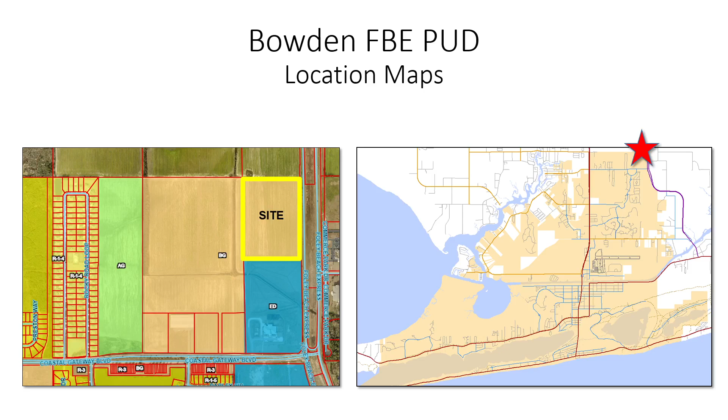These are some maps that illustrate the location. The map on the right shows the entire city limits, with the red star indicating the northeastern portion of our community where the site is located. The image on the left is a zoning map. Immediately to the north are the city of Foley city limits, and immediately to the south that ED zoning is the Auburn vet facility. Much of this area is zoned general business and is largely undeveloped other than a mini storage facility on Coastal Gateway Boulevard. The site is outlined in yellow on that map.

These are some existing ground shots of the property. Again, it's about 23 acres within an area of over 100 acres that is predominantly farmed. Today it's leased out for farming purposes, so there's not much to see here other than the bottom right image, which is the Auburn facility, viewed from Coastal Gateway looking northeast.

As I mentioned, this has been noticed for public hearing on July 28th. There was no correspondence received from that public notice, nor was there any received from the public hearing held at the Planning Commission back in October. The Planning Commission did recommend approval. They're a recommending body on this, and the City Council, as a zoning action, has the ultimate say as to whether or not to approve it. But the Planning Commission did recommend approval unanimously, 6-0.

This is the illustrative master plan for the PUD, shown in the image to the right. You can see up on the northern portion of the site are retail mixed-use buildings, which is one component of this master plan. Then to the south, about 17 acres has 7 different multifamily buildings with 300 multifamily units. They all surround a retention pond as an amenity for the overall development.

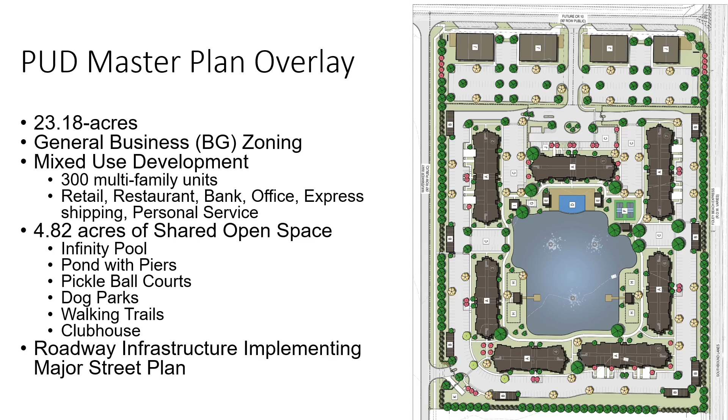Within the multifamily portion of the development, they're proposing about 5 acres of shared open space. That includes an infinity pool just on the north side of the pond, piers on the southern part of the lake on the east and west, 4 different dog parks that bookend either side of the lake, pickleball courts, walking trails, and a large clubhouse. They're also proposing to build out some roadway infrastructure on the north and west sides of the property.

As Planning Commission knows very well, we go through 7 different criteria for the PUD. I'm not going to bore you with the details of all those criteria, but we look at all the adopted plans for the city: the land use plan, which has the future land use map component shown here on the screen, the major street plan, the parks and rec plan, and the bicycle and pedestrian plan. The 2 plans I'm going to focus on here as guides for making recommendations to the Planning Commission are both the land use plan and the major street plan.

So the land use plan, this is the future land use map. The red color is mixed use, retail mixed use, and the blue color is educational, areas slated for educational uses in the future. If you'll remember from the Vision 2025 plan as well as the land use plan, this area has for many years been slated as both a K through 12 opportunity as well as higher learning related to Auburn, the University of Alabama, USA, and others for an educational campus on that blue property.

The yellow is residential medium. That just envisions everything in the yellow, which is pretty much building out according to that vision for predominantly single-family residential development. So that's mostly what you see out there, and that is consistent with the future land use map.

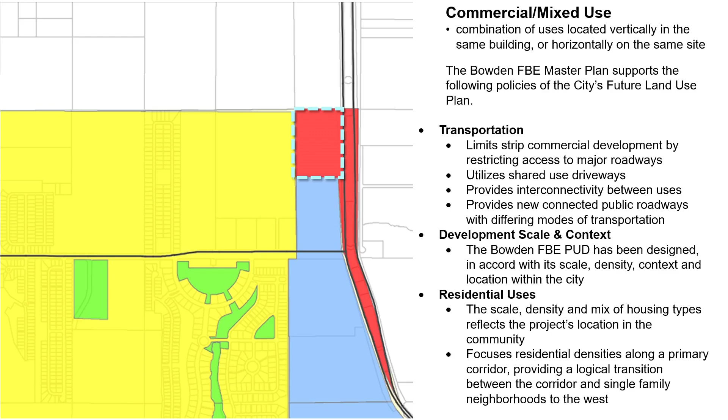So that's kind of our first plan that we typically look at. And this mixed use development is consistent with that land use plan.

This is the conceptual site plan for the PUD. I'm going to focus on both the commercial component on the north, which is outlined in red dashed lines, and then the multifamily portion to the south.

So what they're proposing - I've already covered the uses - the minimum lot size for a PUD in this location is 3 acres. They're at 5.9 acres. The maximum building height permitted is 8 stories; they're proposing 4. They're at the maximum building coverage as well as ISR. They're at the low end of what they're proposing for floor area ratio, or FAR.

The open space for the retail piece will be determined at site plan. The setbacks are consistent for the most part with what the BG zoning allows. Again, the parking will also be determined at site plan because parking is based on use - restaurants have different parking requirements than office, and so on. So once the site plan comes in, that's when we'd apply the parking standards.

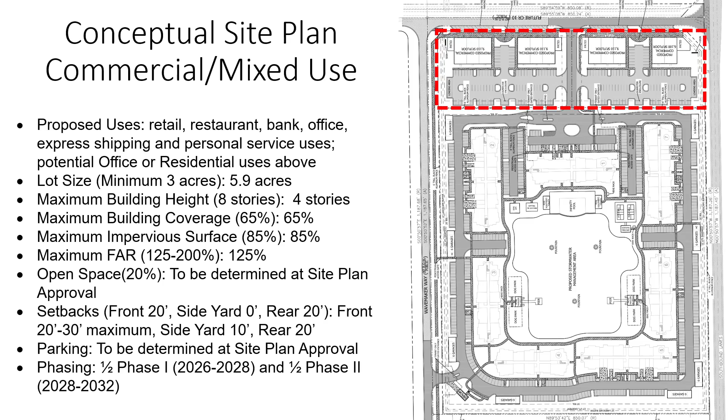They're looking at 2 phases. The first phase is about half of the retail component and all of the multifamily component. The second phase is the westernmost retail component.

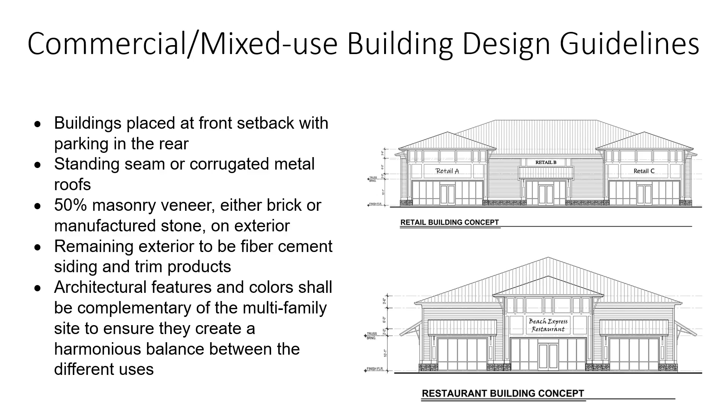They have submitted some commercial and mixed-use building design guidelines. The buildings are a story, placed at the front setback. They have metal roofs, also a mixture of masonry and fiber cement siding as the primary facade materials. The architecture will match that of the multifamily.

Moving on to the multifamily component of the PUD, 300 units are proposed on about 17 acres - that's 17 units per acre. BG, if multifamily is permitted, which is a conditional use in BG, allows up to 20 units per acre, or 345 units. They're proposing 4 stories.

Multifamily can be 4 stories in BG. They're well below the building coverage and the ISR for BG, as well as about half of the floor area ratio permitted in the base zoning of BG. They're exceeding the open space by about 6%.

The setbacks - we've highlighted 115 feet here because the setbacks for multifamily are relatively shallow, and they want to put parking between the buildings and the street, which pushes the buildings back. So the multifamily buildings are much farther off the street than would typically be allowed for multifamily development.

They're exceeding the required parking spaces, and they have a laundry list of proposed amenities within the multifamily piece: clubhouse, pool, fire pits. We'll go over that in a little more detail on the open space plan.

Now, on some of these slides, I've identified the modifications that are requested. The PUD overlay acts as an overlay to the base zoning. The base zoning in this case is general business, so any modifications to that underlying zoning district, any of the standards, have to be spelled out in the PUD. So everything you see in red on these slides is a request for a modification to the underlying zoning.

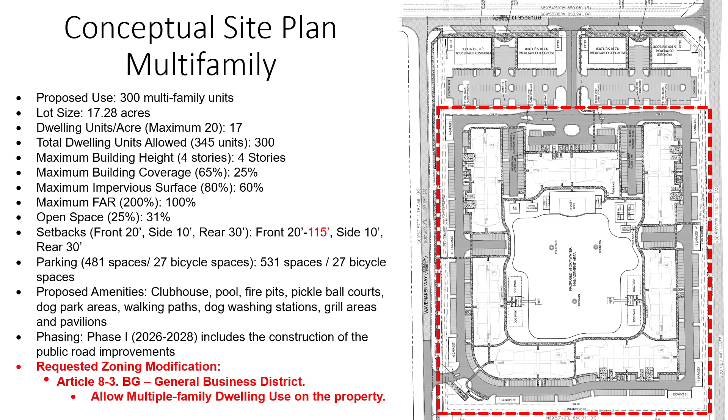So that's an appropriate process to go through. But multifamily cannot be a use on this property without that permission through the PUD.

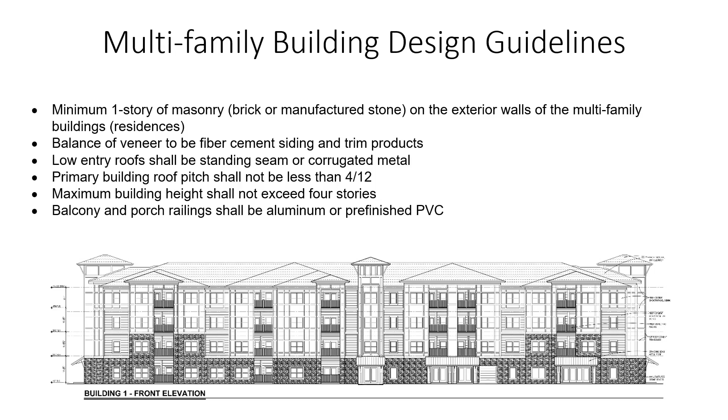They have submitted some multifamily design guidelines. This is an elevation of one of the 7 buildings. They're all 4 stories, all with elevator access. They're not walk-up garden apartments; they have elevator access from an internal corridor. They have at least 1 story of brick veneer, with the rest in fiber cement siding. They have some low entry roofs with metal roofing. The maximum building height will not exceed 4 stories.

Everything in red is a modification request. City Council, relatively 2 or 3 years ago, adopted some design standards for multifamily developments. They are requesting 9 modifications to those multifamily design standards, located in Article 11 of the zoning ordinance.

The first request is to allow a single housing type, called a corridor flat. It's spelled out in the zoning ordinance, but that's an apartment unit. They're supposed to provide 4 different housing types, ranging from a cottage to a townhouse to a duplex to a patio home. There's a wide range of housing types prescribed by the zoning ordinance, but they just want to do 1.

The second modification is to not raise the finished floor to 18 inches, which is a requirement for multifamily in the zoning ordinance. They want to put these slab on grade.

The third modification is to allow reduction in the 12-foot minimum width of a private outdoor space. There's a standard in the multifamily design standards for dimensions of private outdoor space, like a patio or balcony, requiring a minimum width of 12 feet. They would like to go below that minimum, so they're asking for a modification there.

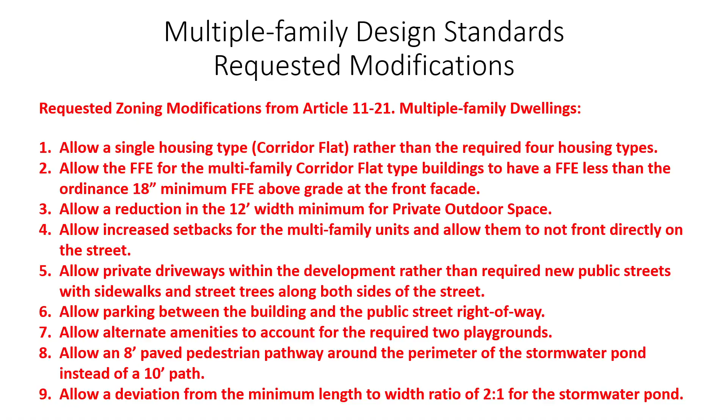Also, they're requesting a deviation from the 2-to-1 width ratio. A detention pond is usually really efficient—either a square or a circle—and it's not really curvilinear or natural looking. The multifamily design standards were intentional in saying that if you're going to have a detention pond and want to use it as open space, it needs to look like a natural feature. So they have the 2-to-1 ratio, which they don't meet. Their detention pond is more of a square or a circle.

So those are all the modification requests from the multifamily design standards.

Another plan we look at—we worked with this applicant to try to implement the city's major street plan. The image to the left is a zoomed in version of that plan, and the image on the right is the adopted major street plan. We're working right now on multiple projects to implement it. The streets in blue are existing streets called for improvements, many of which are ongoing now, as you can tell from barrels and cones. The dashed orange lines are proposed new streets to help create a finer grid in order to disperse traffic throughout the community, so they're not all on one north-south or east-west street.

This particular property is in that red dashed box on the left image. There's a proposed new street on the alignment of what would be County Road 10 on the north side, and a north-south connector street that would go across Coastal Gateway Boulevard to the new high school site and beyond, on the west side of the property.

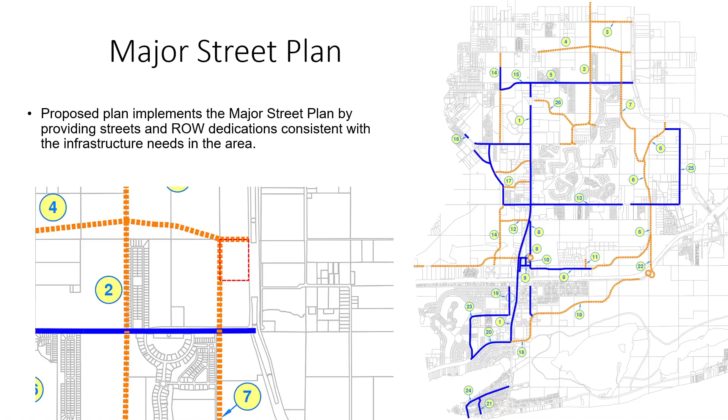So we worked with this developer to implement both of those new streets in their plan. This is their circulation plan for vehicles there on the right. Foley Beach Express is on the far right, and Coastal Gateway is on the bottom there.

In the first phase, they're proposing to construct County Road 10, shown with light blue dots, to their northern entrance, which is that northern asterisk. And the light blue dots on the south would be a new street constructed from the entrance to the high school up to their southern entrance.

That would all be constructed as part of phase 1. The multi-use trails would continue around for bikes and pedestrians, but when phase 2 came online, that's when the green dots would be built out. So they are proposing to dedicate right-of-way and construct roadways in order to implement the major street plan.

Again, in red, these are their requested modifications. One is to Article 14 for off-street parking and loading. They want increased driveway width in their parking lots of 26 feet rather than what the code requires, which is 24. The reasoning is to fight fires in buildings at 4 stories. The fire code requires a minimum width of 26 feet to set up apparatus and fight fires in taller buildings, so they're required to go to 26 from the zoning required 24 based on the fire code.

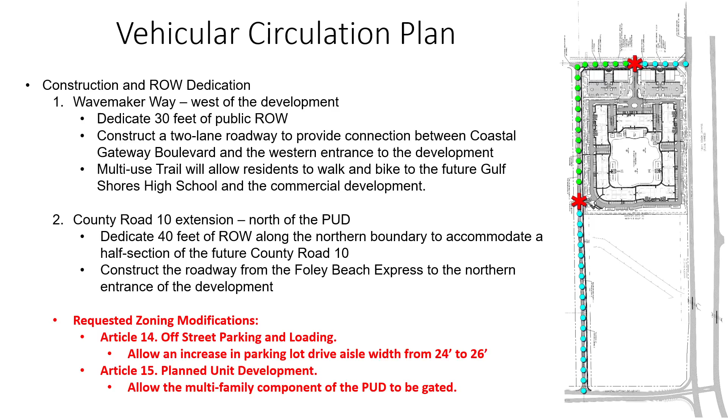Article 15 modification - PUDs are not supposed to be gated. In this case, they would like to gate the PUD, and that's another modification request.

Open space plan. Again, there are a lot of amenities here. Everything in light yellow around the pond, as well as the pond area and pathway around, are all shared open space. They qualify as shared open space based on the multifamily design standards. They meet or exceed, other than the playgrounds, the shared open space requirements.

Again, it's 31% of the site that is shared open space. Everything shown in green is additional open space, doesn't count as shared, but it's about 5.5 acres of landscape buffers, landscaping, just open areas in between buildings.

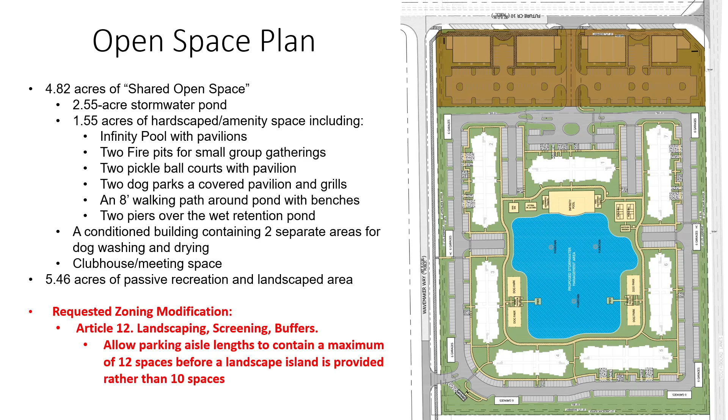They are requesting a modification to Article 12, which requires a landscape island every 10 parking spaces. They're requesting a modification to allow them to provide 12 parking spaces between landscaped islands.

Staff and the Planning Commission are recommending approval. This does meet and helps implement the future land use plan as well as the major street plan.

A development mitigation plan, which is a requirement of the zoning ordinance for multifamily projects, will be required at the time of site plan application. This will be an updated traffic impact study, which they have submitted for the zoning, but also that plan will be looking at stormwater infrastructure, as well as sewer and water for the site, and will make recommendations for any off-site improvements for those utilities.

Second, prior to the issuance of a building permit, FAA Form 7460 will be required. That's typical of any building within the airport overlay district, the flight area overlay district.

Third, at the time of the first site plan application, the applicant shall work with staff to incorporate the recommendations of the development mitigation plan related to Wavemaker Way and County Road 10. That plan is going to be looking at all the infrastructure, and they'll need to work with staff on implementing that mitigation plan.

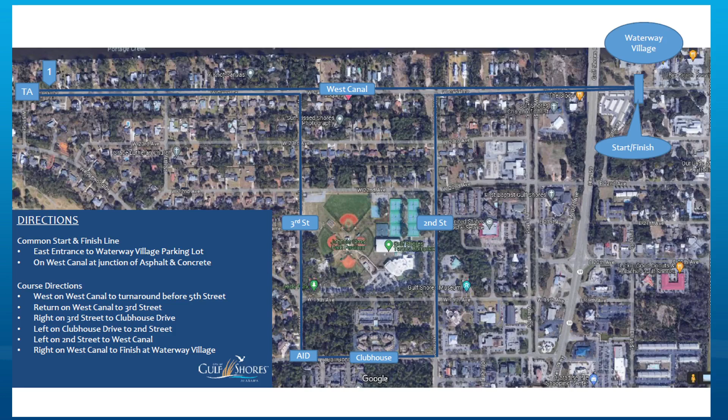We have the applicant - I just spoke to him on the phone. We do not have his insurance yet, but he assured me he would get that to us prior to next week's action, and also have a letter from Tacky Jacks offering support for this event. It has been reviewed by all of our city staff, and it's going to be ready for your consideration next Monday with a recommendation to approve. Be glad to answer any questions.

Thanks, Grant. Council, any questions or comments? Anybody in the audience? Next, and the next is also an event that's been held in our community for a number of years.

This is the Bike MS Tour de Beach. This is a bike ride, not a race, but a bike ride fundraiser for the National Multiple Sclerosis Society. It's a 2-day event requesting to take place on September 27th and September 28th. There are 3 routes per day with an overall estimated attendance of about 200 bikers. All these rides begin and end at the Lake Shelby area.

The city facilities being requested are really just the roadways and the rights of way. They run a number of different routes: a short route of 25 miles, a middle route at 42 miles, and a long route at 55 miles, with similar routes on Sunday.

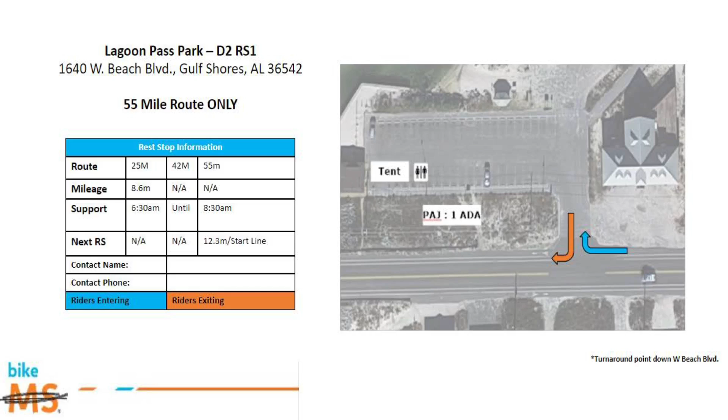This application has also been reviewed by staff, and what's a little different is this is not a race, this is a bike ride. State law says there are no laws against riding bicycles on roadways if you follow the traffic lights and traffic signs. So we feel like this is an appropriate request. We've done this for a number of years with no incidents, and therefore we will be recommending approval for this event at your meeting next week. Happy to answer any questions.

What are the dates again? September 27th and September 28th of this year. So two months from now.

We've had a lot of discussion tonight about traffic and congestion on roads, and I can't imagine that this won't add to that. Now, we don't know what September is going to be, but I think it's something we need to think about. We also talked a little this morning at our staff meeting about the use of the Highway 59 bridge and the construction going on with that third lane. I think because several of these races use that for getting north and south out of the city limits, making sure our construction schedule on the roadway and that bridge matches with this is something to think about as we study it.

And all this will be on next Monday. It will be, and we can get back together with the police department who have reviewed this application, and they are in support of it at this point, but we can sure get back together and go through the merits of the applicant and get the applicant here to discuss some of the concerns.

You know, riding bikes on roadways is legal as long as you follow traffic laws, so it's a hard thing to not allow them to do this. Well, specifically, I'm worried about the bridge. Yes, sir. And the construction on that bridge, so.

Any other comments, council? Anybody with anything additional? That ends the formal agenda for tonight.

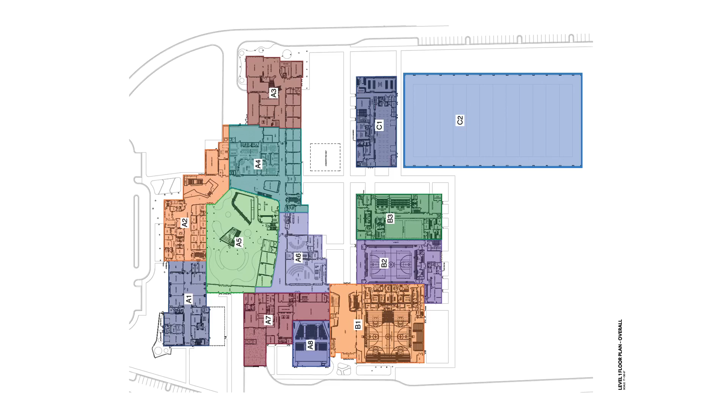So I'd like to talk about a couple of things: what did fall actually, and where is it located on the building, and orient that with the site. What fell was the partial framing of a roof structure that's going to cover our practice field. If you look in the blue, that C2 building is our practice field. This building is not part of the main high school building—it's a detached roof structure that sits out over the field.

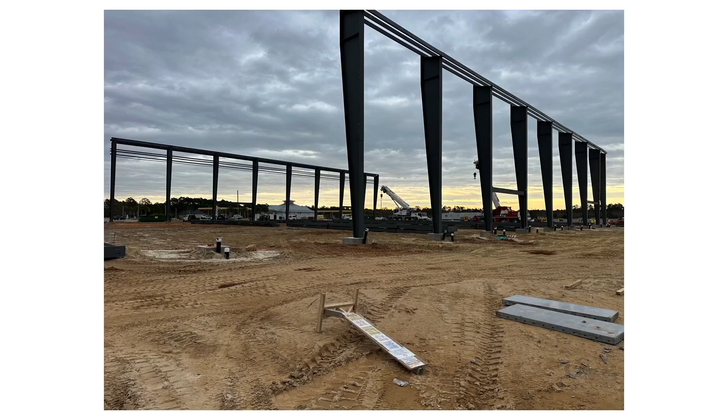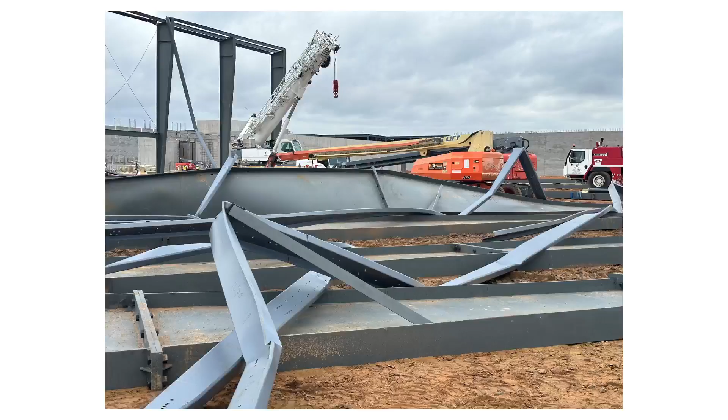By late that night, this is what we were dealing with—closed roads and bridges. So for the next 4 days, no one went back to that job site. On the 26th, the crew returned and started putting up some more bracing and a few trusses. Late that night, early that morning, they fell. This is the aftermath—you can see part of it still standing. And yes, that is what collapsed.

That was our 'collapsed high school.' Just putting it all in perspective—a lot of this I didn't know until I started getting these calls from Birmingham asking why the school was falling down again. But it's important that we all know, and that the right message is shared out there.

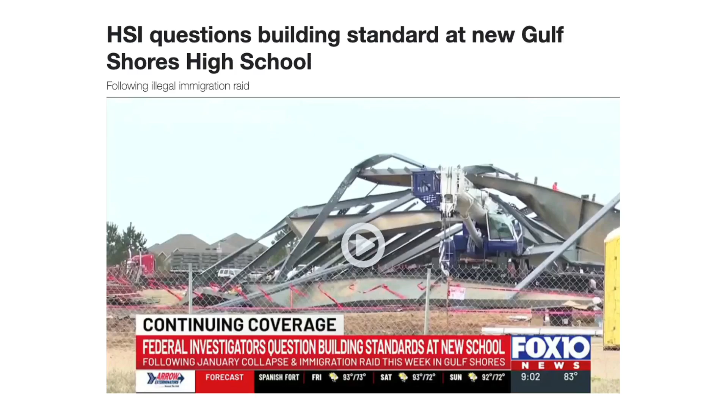Fast forward to June—this is our visit from Homeland Security, which I fully support. An HSI Homeland Security agent questioned the standards of the building at Gulf Shores High School. There were 37 illegals detained from the job site that day.

So that just kind of pushed—that was it. That's the building that fell. That's what we've heard about. That was our 'school collapse.'

The second thing I want to share some information and facts about is the process that bidders, or general contractors, go through to get into the process to bid on this school.

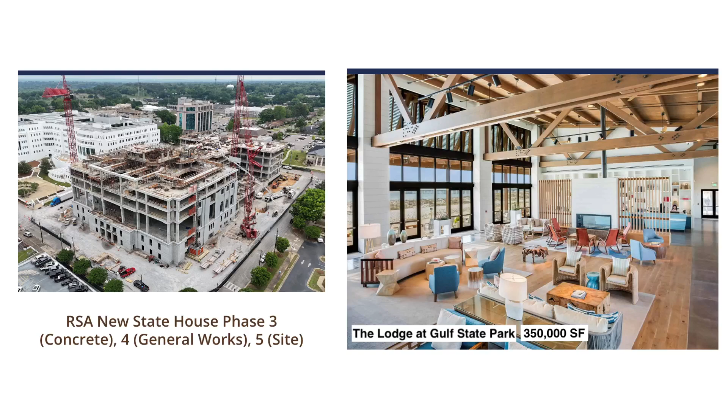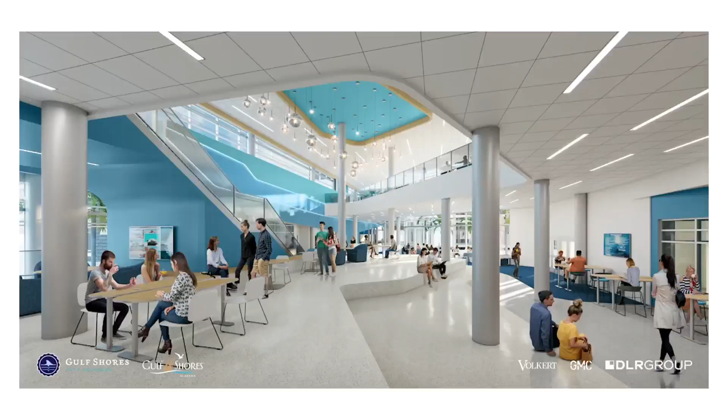They've done an enormous amount of work for education institutions, for municipalities, for state government. The RSA New State House that they're doing now, Phase 3. They built the lodge at the Gulf State Park, 350,000 square feet. Auburn High School, 350,000 square feet. George Washington Carver High School, 200,000 square feet. So they're absolutely qualified to do the work.

And for Homeland Security to even question them like they did and want to question our school, I think was totally inappropriate. I don't know where it's proven that illegal equals unskilled, no more than legal equals skilled. It has nothing to do with it, Homeland Security has really no position in making that statement.

But this is what we have. Back to the building when it fell, there was a question about what's this going to cost the city taxpayers and who's going to pay for this. Rabren General Contractors contacted the contractual parties involved, which would be the city, the school board, and our engineering design firm that very same day, and said, this is our problem on site. This is between us and our subcontractors and our insurance companies. And the city nor the school board will be involved in this resolution financially or in any other way. That was that morning. And that's fact. That's just contract law. We don't have a role there.

They put investigators on the site immediately. We're not professional investigators, and that's going to come down to a legal battle that if you're not involved in it, you don't need to make comments on what really happened. But we saw the circumstances around it.

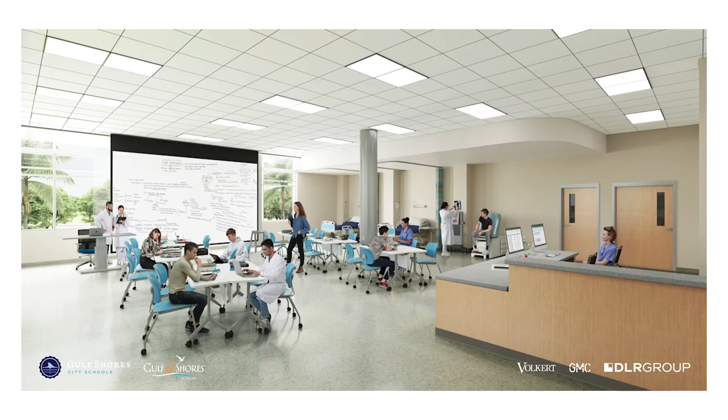But this high school, to me, is going to be one of the finest learning institutions in our region, if not beyond. And what we will offer to students that will help them excel at the next level is just nothing short of amazing. And that's whether it's college prep, whether it's vocational, whether they're in arts, athletics, engineering, marine science, they're going to get an exceptional opportunity here to excel in life.

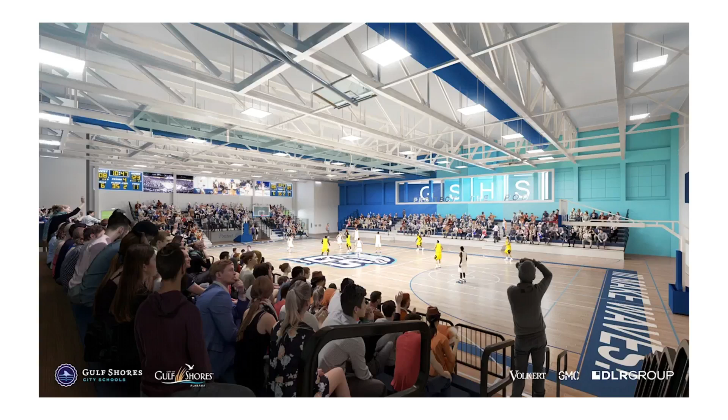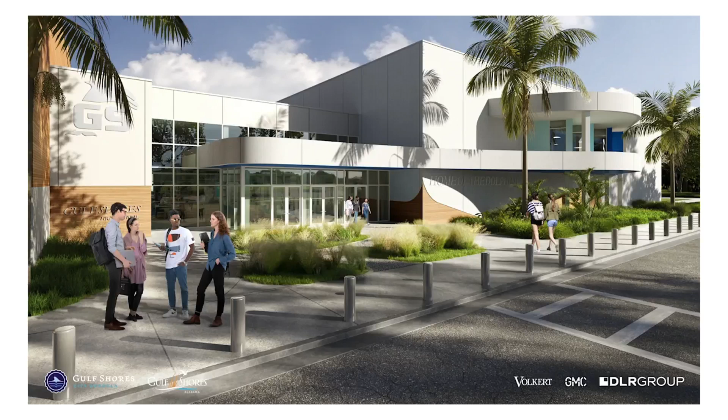And to me, for any misinformation to question the integrity of what's going on there is really an injustice to the school, the community, and the students and faculty. And so it's just a little, if I'm coming out a little frustrated, I probably am, that headlines don't always sell the truth. But this is the truth. These are the facts. And that is what our high school is going to look like when we get it finished.

But I hope that clears up some. I hope my buddy in Birmingham is listening and watching, because he's called me twice. So anyway, that's all I have, Mayor. I appreciate the time.

Thank you, Philip. Did that create anyone that wants to say anything after listening to that? Anybody?

I would just like to thank, use the microphone, we got folks listening at home too. Angie Swiger. I'd like to thank Philip for making that presentation, because I think that's what people are looking for. I think in the absence of communication, imagination takes over. And when we have not one incident, but two, then people start to question what's going on because they don't know. And I wish we would have had this kind of presentation much earlier on so that people would know. And absolutely good to know. Everyone needs to know that the school is safe, that everyone feels good about it, the quality of Rabren, the quality of the investigations and the process that you've gone through. I think that's exactly what people were looking for. So I appreciate it. Thank you.